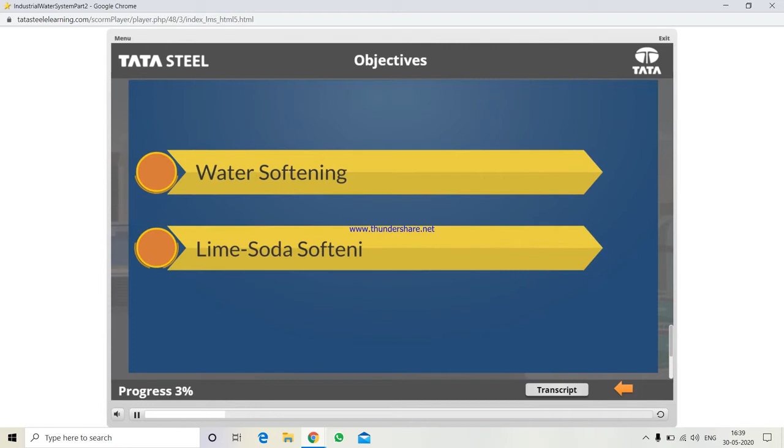This module will enable you to get an idea about water softening and lime soda softening. Explain about ion exchange, in which we will learn resin classification, cationic exchangers and anionic exchangers, ion exchange resin, regeneration,

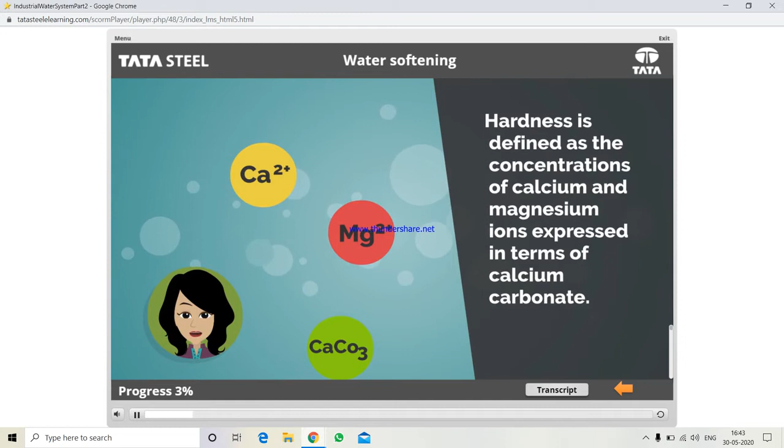They react with soap and produce a deposit called soap curd that remains on the skin and clothes, and because it is insoluble and sticky, it cannot be removed by rinsing. Thus, hard water is one that does not produce lather with soap.

Measurements of hardness are given in terms of the calcium carbonate equivalent. Water is considered to be hard if it has a hardness of 100 mg per liter or more as calcium carbonate.

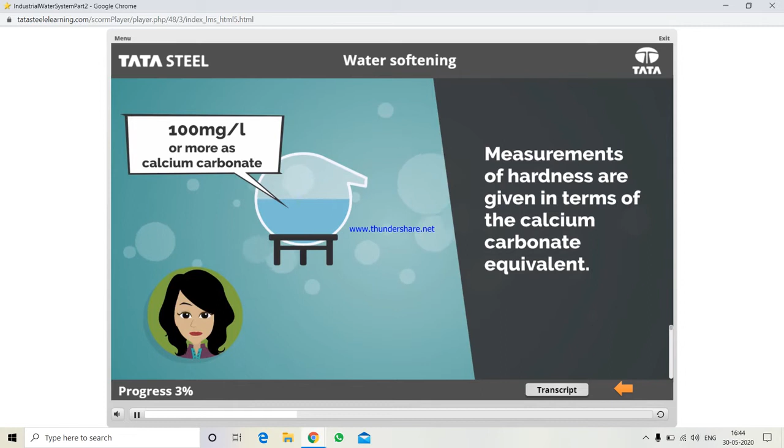There are two types of water hardness, temporary and permanent. Temporary hardness is due to the bicarbonate ion being present in the water. This type of hardness can be removed by boiling the water to expel the carbon dioxide.

Permanent hardness is due to calcium and magnesium nitrates, sulfates and chlorides. This type of hardness cannot be eliminated by boiling. Permanent hardness of water is removed by the ion exchange method in an ion exchanger.

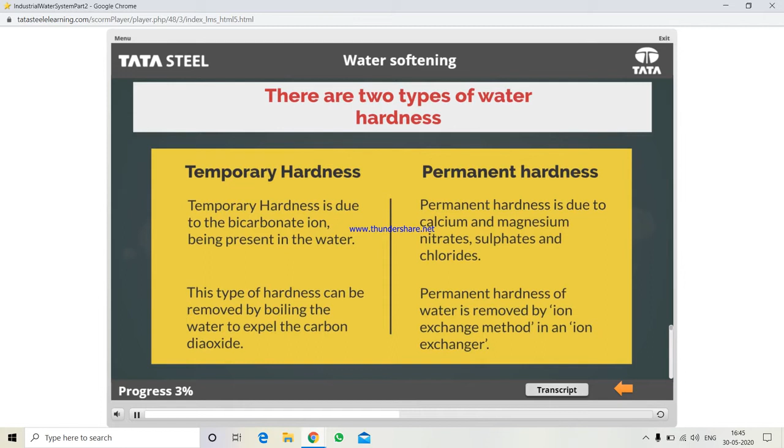Since it is important to remove hardness from water, we have opted for the water softening process. Softening is the removal of hardness from water. This is not a required part of the drinking water treatment process, since hard water does not have any health consequences. Rather, minerals are required for taste and health. In addition to being unsightly,

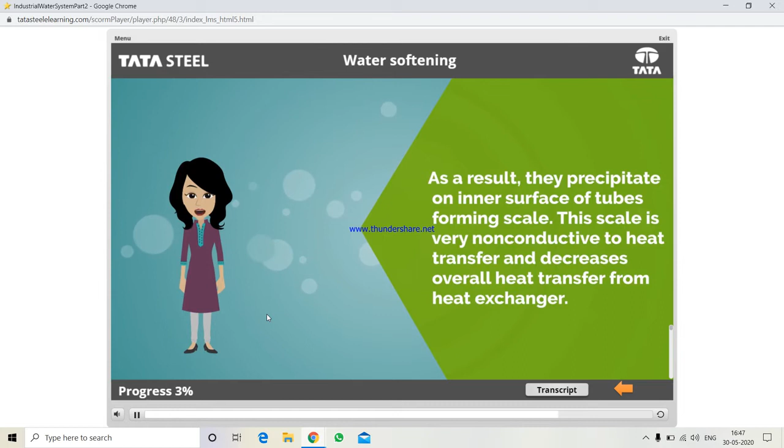the reaction of hard water with soap results in excessive use of soaps and detergents. Upon heating in a heat exchanger, unlike other solutes, solubility of soluble minerals decreases with rise in temperature. As a result, they precipitate on the inner surface of tubes, forming scale. This scale is very non-conductive to heat transfer and decreases overall heat transfer from the heat exchanger. This may result in overheating of tubes that can cause tube failure.

So, there are a few processes by which softening of water can be done. There are 3 types of softening treatment: chemical precipitation, lime soda softening, zeolite process, and reverse osmosis.

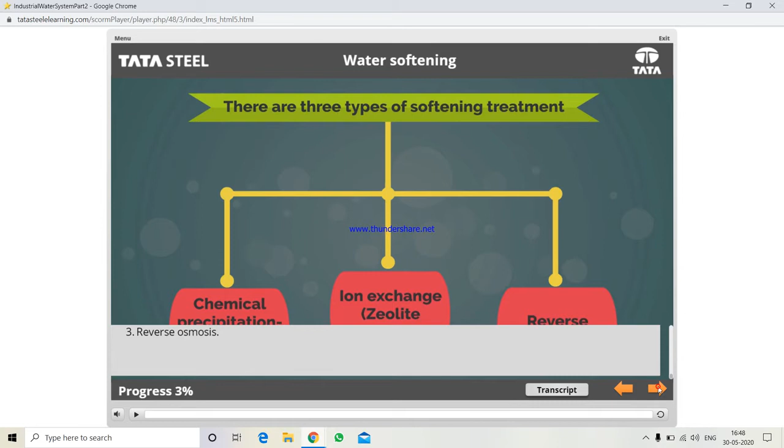The first process in water softening is lime soda softening. Have you ever learned about lime soda softening? If no, let's learn it now. In this process, calcium and magnesium ions are precipitated by the addition of lime and soda ash. Following are the reactions that take place in this process.

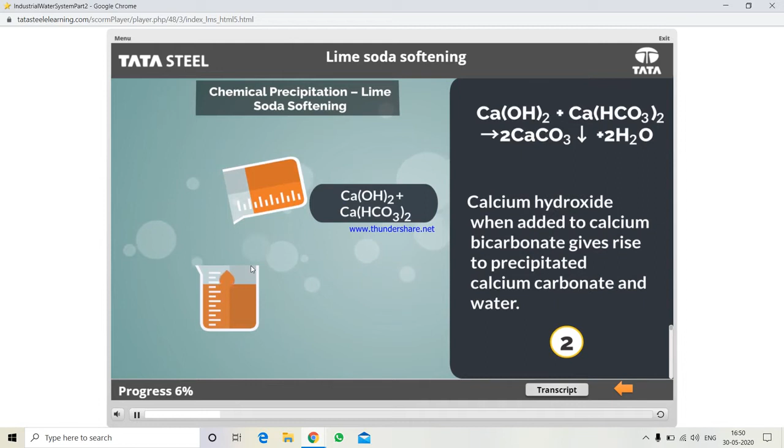Calcium hydroxide, when added to carbon dioxide, gives rise to precipitated calcium carbonate and water. Calcium hydroxide, when added to calcium bicarbonate, gives rise to precipitated calcium carbonate and water. Calcium hydroxide, when added to magnesium bicarbonate, gives rise to magnesium carbonate and precipitated calcium carbonate and water. Calcium hydroxide, when added to magnesium carbonate, gives rise to precipitated calcium carbonate and magnesium hydroxide.

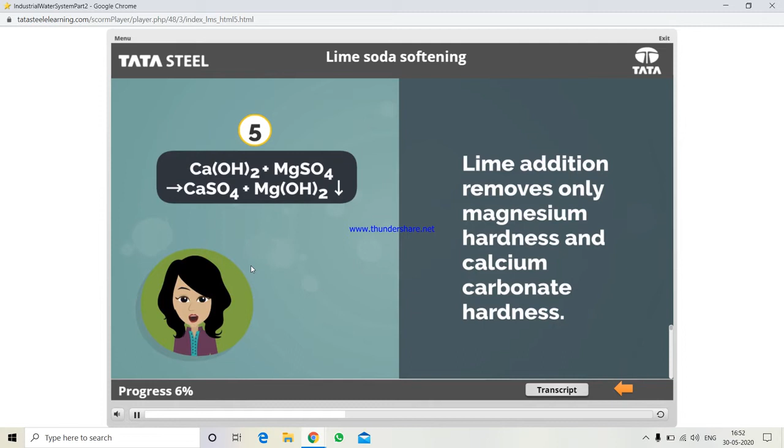Calcium hydroxide, when added to magnesium sulfate, gives rise to calcium sulfate and precipitated magnesium hydroxide. Let's go deeper into the process. Lime addition removes only magnesium hardness and calcium carbonate hardness. If you see in equation number 5, magnesium is precipitated. However, an equivalent amount of calcium is added. The water now contains the original calcium non-carbonate hardness and the calcium non-carbonate hardness produced in equation number 5.

Soda ash is added to remove calcium non-carbonate hardness. Sodium carbonate, when added to calcium sulfate, gives rise to sodium sulfate and precipitated calcium carbonate. Keeping the equations in mind, to precipitate calcium carbonate requires a pH of about 9.5 and to precipitate magnesium hydroxide requires a pH of about 10.8. Therefore, an excess lime of about 1.25 milliequivalents per liter is required to raise the pH.

The amount of lime required is equal to the amount of carbon dioxide in milliequivalents per liter plus carbonate hardness in milliequivalents per liter plus magnesium ion in milliequivalents per liter plus 1.25 milliequivalents per liter. The amount of soda ash required is equal to non-carbonate hardness in milliequivalents per liter.

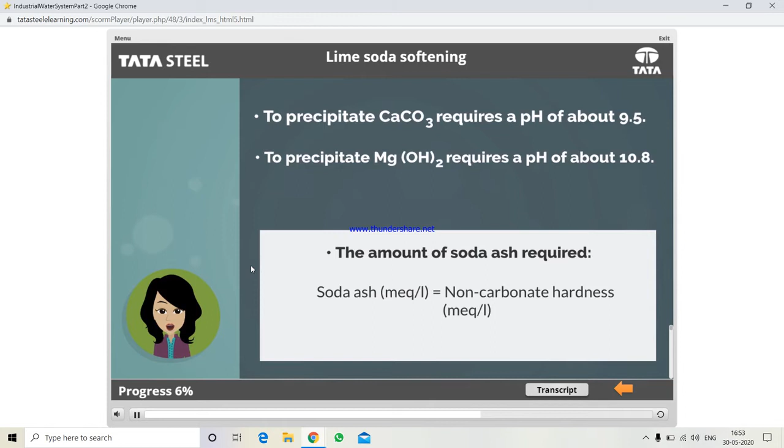After softening, the water will have high pH and contains excess lime and also magnesium hydroxide and calcium carbonate that did not precipitate. Recarbonation, that is addition of carbon dioxide, is done in order to stabilize the water. The excess lime and magnesium hydroxide are stabilized by adding carbon dioxide, which also reduces pH from 10.8 to 9.5.

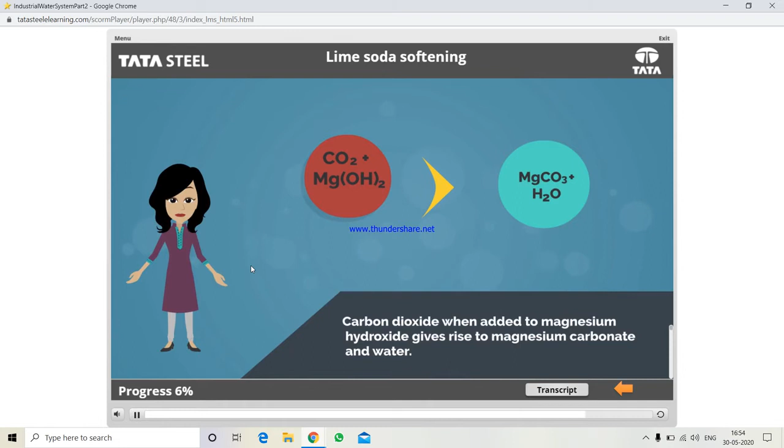Carbon dioxide, when added to calcium hydroxide, gives rise to precipitated calcium carbonate and water. Carbon dioxide, when added to magnesium hydroxide, gives rise to magnesium carbonate and water. Further recarbonation will bring the pH to about 8.5 and stabilize the calcium carbonate. Carbon dioxide, when added with calcium carbonate and water, gives rise to calcium hydrogen carbonate.

It is not possible to remove all of the hardness from water. In actual practice, about 50 to 80 mg per liter will remain as residual hardness.

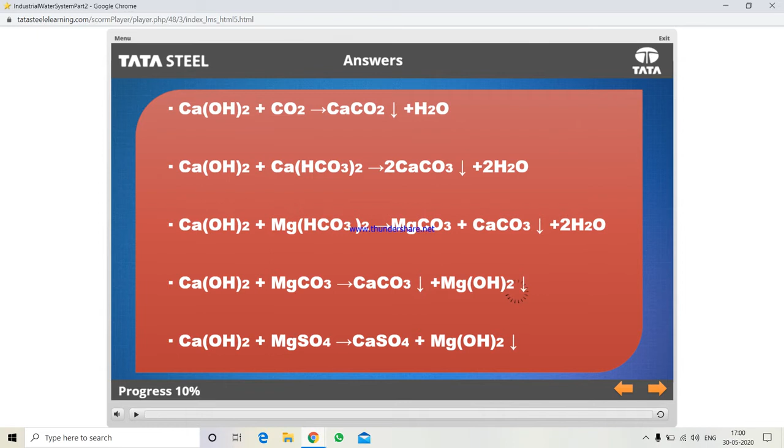Remember the previous session where we ended up with lime soda softening, which takes up a major role in removing the hardness from water. After the softening process, the water undergoes ion exchange, which is an adsorption phenomenon where the mechanism of adsorption is electrostatic. Electrostatic forces hold ions to charged functional groups on the surface of the ion exchange resin. The adsorbed ions replace ions that are on the resin surface on a 1:1 ratio charge basis.

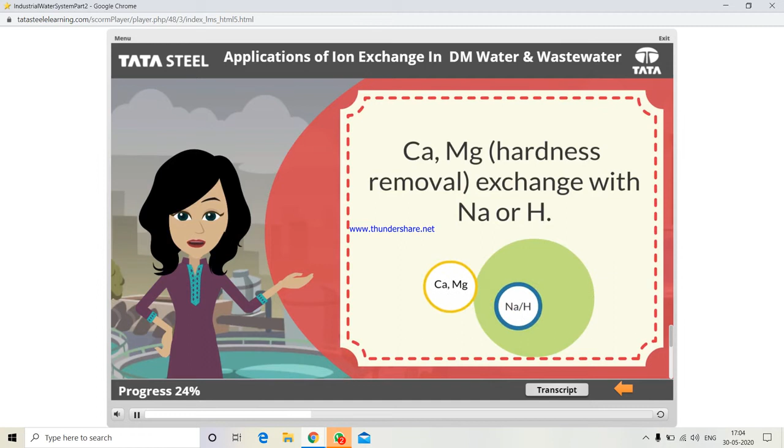As we have now understood the ion exchange phenomenon, let's note down the applications of ion exchange in treatment of DM water and wastewater. Calcium and magnesium, that is hardness removal, exchange with sodium or hydrogen. Iron and manganese removal from groundwater.

Recovery of valuable waste products: silver, gold, uranium. Demineralization, that is, exchange all cations for hydrogen ion and all anions for hydroxide ion. Removal of nitrate, ammonium, phosphate, that is nutrient removal.

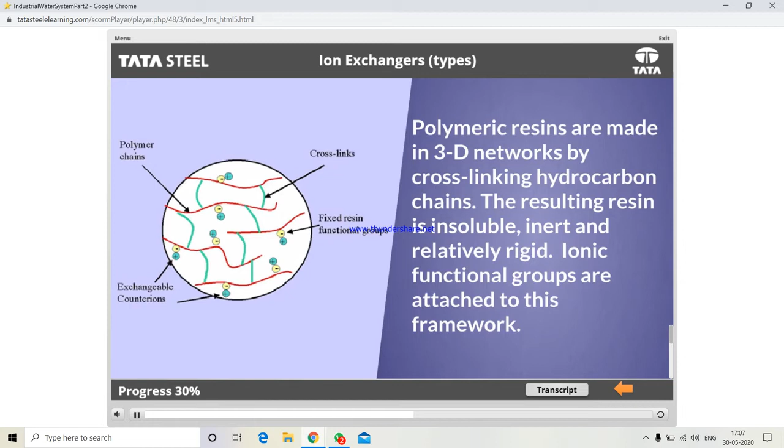These resins are generally manufactured by polymerizing neutral organic molecules, such as styrene, to form polystyrene, and then cross-linked with divinyl benzene, that is, DVB. Functional groups are then added according to the intended use. For example, the resin can be sulfonated by adding sulfuric acid to get the structure shown.

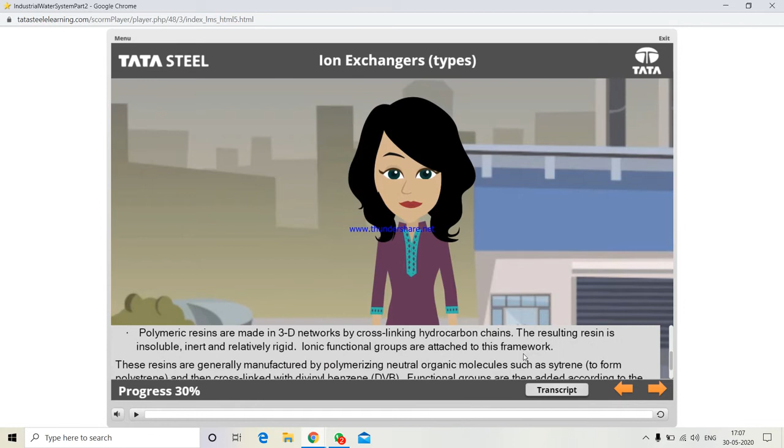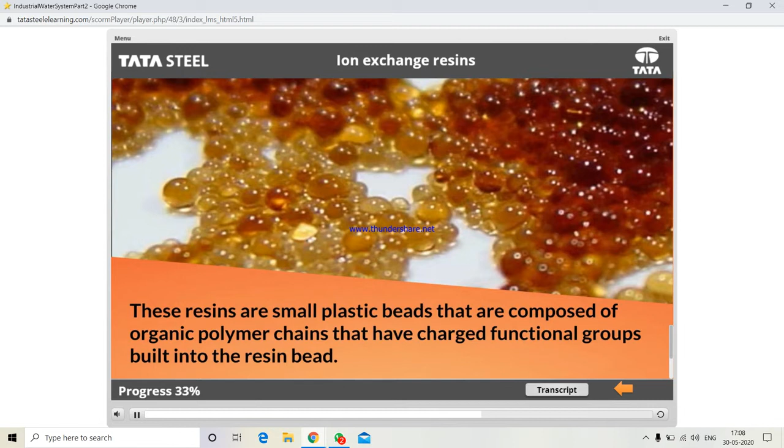Let us know more about the uses of ion exchange resins. The ion exchange resins are used to produce deionized, that is, demineralized water. These resins are small plastic beads that are composed of organic polymer chains that have charged functional groups built into the resin bead. You can clearly see the structure of an ion resin bead in this picture.

Resin classification. Resins are classified based on the type of functional group they contain and their percentage of cross-linkages. So they are basically of two types: cationic exchangers and anionic exchangers.

Cationic exchangers. Strongly acidic in cationic exchangers, which are functional groups derived from strong acids.

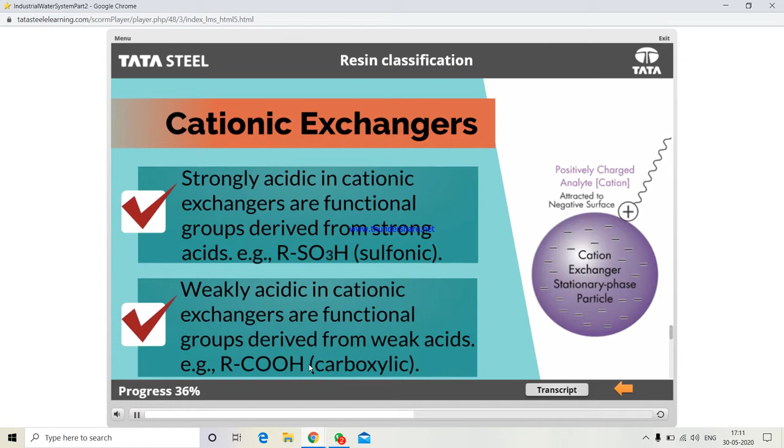Weakly acidic in cationic exchangers, which are functional groups derived from weak acids. Anionic exchangers. Strongly basic in anionic exchangers, which are functional groups derived from quaternary ammonium compounds. Weakly basic in anionic exchangers, which are functional groups derived from primary and secondary amines.

The regeneration of cation and anion exchange resins used in deionizers is a more complicated process than simple softening. Spent or exhausted columns must be regenerated because of the cost of the resin that would make one-time use prohibitive. Since ion exchange is a very reversible process, regeneration can be accomplished by manipulation of solution composition. Let us also see an example.

A spent column used to remove calcium cation is to be regenerated in a batch process to the sodium cation form. A strong brine, mostly sodium chloride, is contacted with the exhausted resin to replace calcium with sodium. The strong acid cation exchanger resin is regenerated with sulfuric or hydrochloric acid, which effectively strips off the calcium, magnesium and sodium from the resin, substituting hydrogen. Caustic soda or sodium hydroxide is used to regenerate the anion resin, exchanging the collected anions for the hydroxide ion in the caustic.

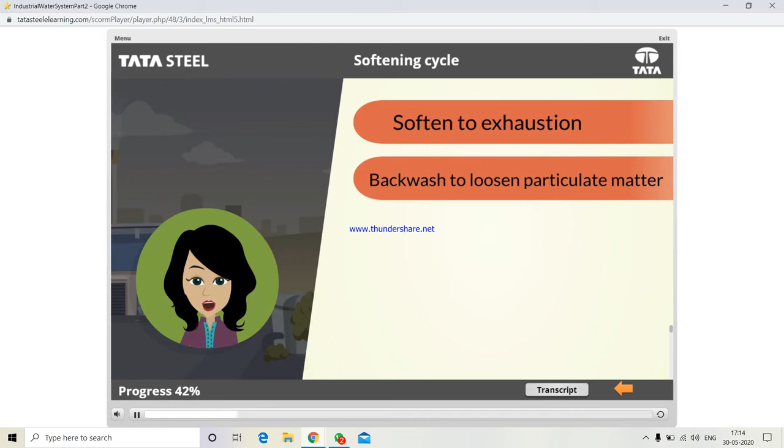The softener removes hardness from water by a process known as ion exchange, and the steps involved are: soften to exhaustion. In this process, the water will be softened. Backwash. In this process, the direction of flow is reversed and the silt, sediment, and iron particles are flushed from the resin. Regeneration. In this stage, the brine solution is slowly passed through the resin until the resin retains as much sodium as possible.

Rinse. Excess brine is rinsed from the resin. Return to forward flow. The resin bed is compacted for maximum operating efficiency. The water softener then returns to the service cycle. Let us now note down the operating parameters for the softening cycle.

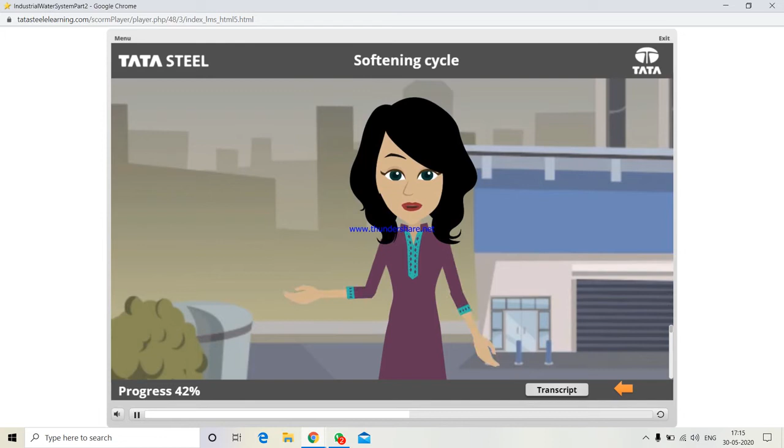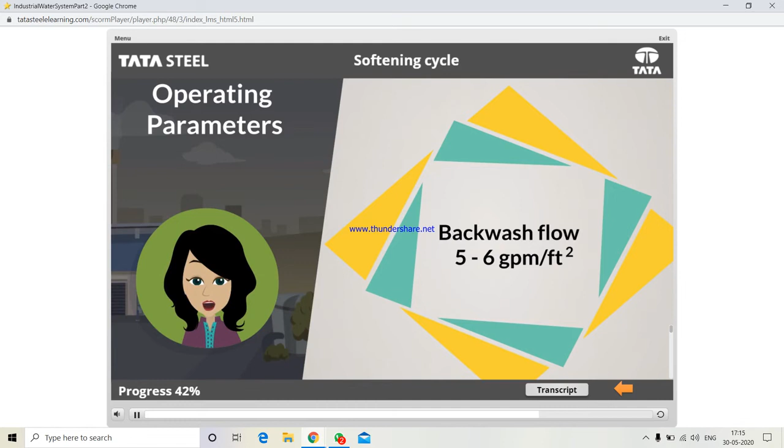Operating parameters. The operating exchange capacity is 0.6 to 1.2 equivalents per liter. Bed depth is 2 to 6 feet. Head loss is 1 to 2 feet. Softening flow is 5 to 10 gallons per minute per square foot. Backwash flow is 5 to 6 gallons per minute per square foot.

Salt dose is 3 to 10 pounds per cubic foot resin brine. Brine contact time 25 to 45 minutes. Rinse flow 1 to 5 gallons per minute per square foot. Rinse volume 20 to 40 gallons per cubic foot resin.

Remember, previously we discussed a process called sedimentation, which was explained by Mr. Ashok. Today, he will be telling us about RO. Thank you, Shreya. Hello everybody. I know that many of you are aware about RO, but it is a little different from what you know.

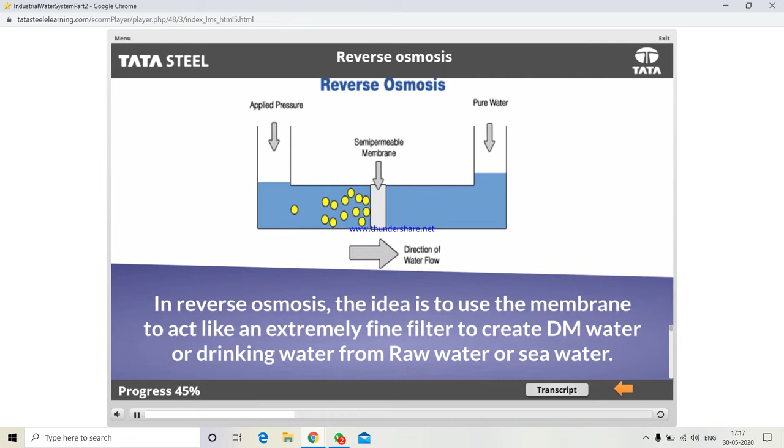So reverse osmosis is a separation process that uses pressure to force a solvent through a membrane that retains the solute on one side and allows the pure solvent to pass to the other side, meaning it allows the passage of solvent but not of solute. In reverse osmosis, the idea is to use the membrane to act like an extremely fine filter to create DM water or drinking water from raw water or sea water.

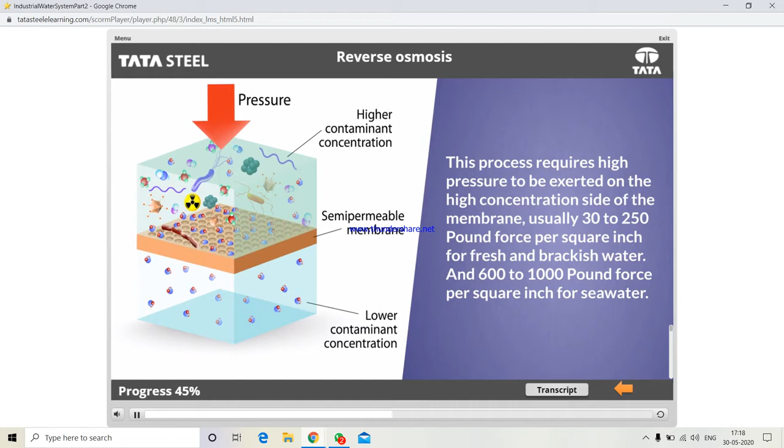The membranes used for reverse osmosis have a dense barrier layer in the polymer matrix where most separation occurs. In most cases, the membrane is designed to allow only water to pass through this dense layer while preventing the passage of solutes. This process requires high pressure to be exerted on the high concentration side of the membrane, usually 30 to 250 psi for fresh water and brackish water, and 600 to 1000 psi for seawater. Reverse osmosis is used to reduce dissolved solids from feed waters.

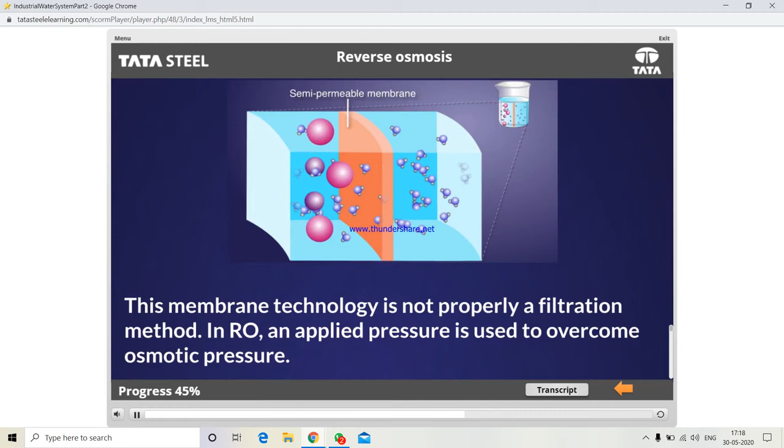Let us see the actual working involved in this process. Reverse osmosis is a water purification technology that uses a semi-permeable membrane. This membrane technology is not properly a filtration method. In RO, an applied pressure is used to overcome osmotic pressure.

RO can remove many types of molecules and ions from solutions and is used in both industrial processes and in producing potable water. Reverse osmosis works by using a high pressure pump to increase the pressure on the salt side of the RO and force the water across the semi-permeable RO membrane, leaving almost all, around 95% to 99%, of dissolved salts behind in the reject stream.

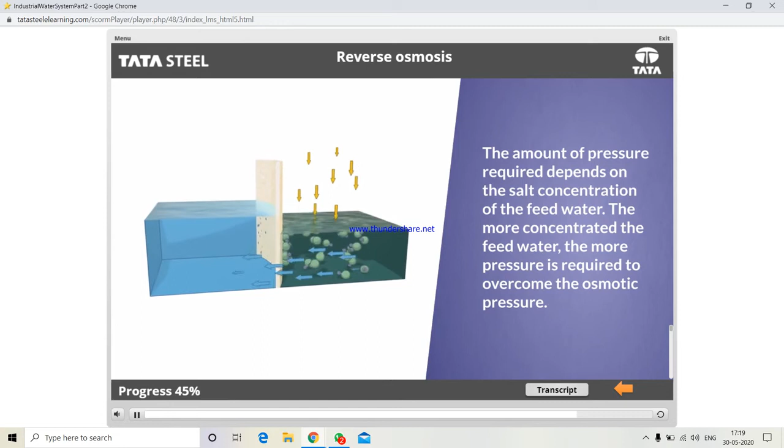The amount of pressure required depends on the salt concentration of the feed water. The more concentrated the feed water, the more pressure is required to overcome the osmotic pressure. The desalinated water that is demineralized or deionized is called permeate water. The water stream that carries the concentrated contaminants that did not pass through the RO membrane is called concentrate stream.

Thank you, sir, for the explanation.

In our houses and industries, we do have an RO water filter that purifies water. Have you ever thought, how does it work? RO systems commonly come in either single pass or double pass configurations. The feed water enters the RO membrane under pressure that is enough to overcome osmotic pressure.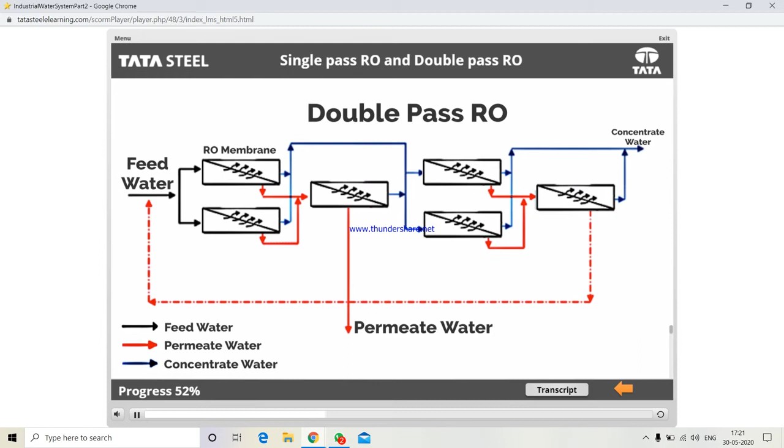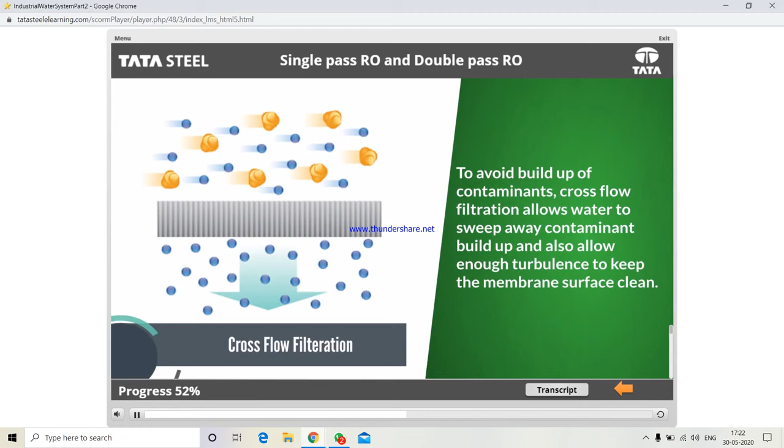An RO system employs cross-filtration rather than standard filtration, where the contaminants are collected within the filter media. With cross-filtration, the solution passes through the filter with two outlets. The filtered water goes one way and the contaminated water goes another way. To avoid buildup of contaminants, cross-flow filtration allows water to sweep away contaminant buildup and also allows enough turbulence to keep the membrane surface clean.

Learning more about the RO process, let us see what else can be done in the process. Reverse osmosis is capable of removing up to 99% of the dissolved salts, particles, colloids, organics, bacteria, and pyrogens from the feed water. An RO membrane rejects contaminants based on their size and charge. Any contaminant that has a molecular weight greater than 200 is rejected by an RO system. The greater the ionic charge of the contaminant, the more likely it will be unable to pass through the RO membrane.

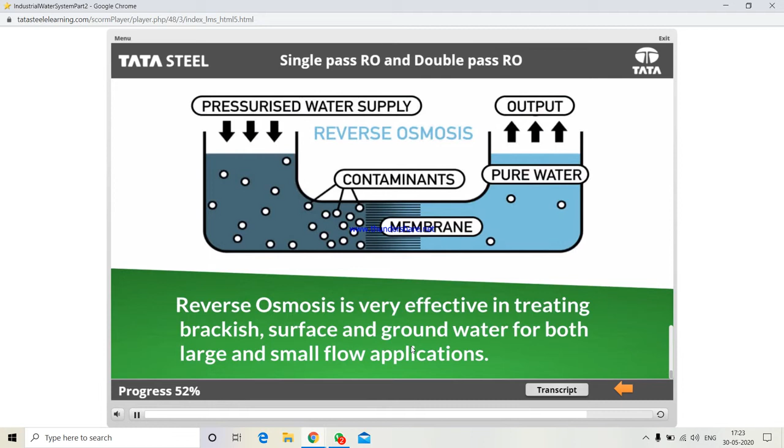Reverse osmosis is very effective in treating brackish, surface and groundwater for both large and small applications. Some examples of industries that use RO water include pharmaceutical, boiler feed water, food and beverage, metal finishing, and semiconductor manufacturing.

Did you know 300 tons of water is required to manufacture 1 ton of steel?

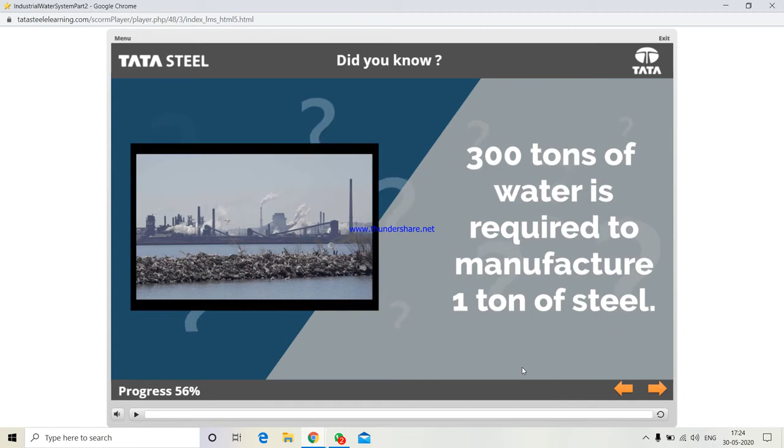Do you know any device that removes oxygen? Yes, you are right. We will be discussing the deaerator. A deaerator is a device that is widely used for the removal of oxygen and other dissolved gases from the feed water to steam generating boilers.

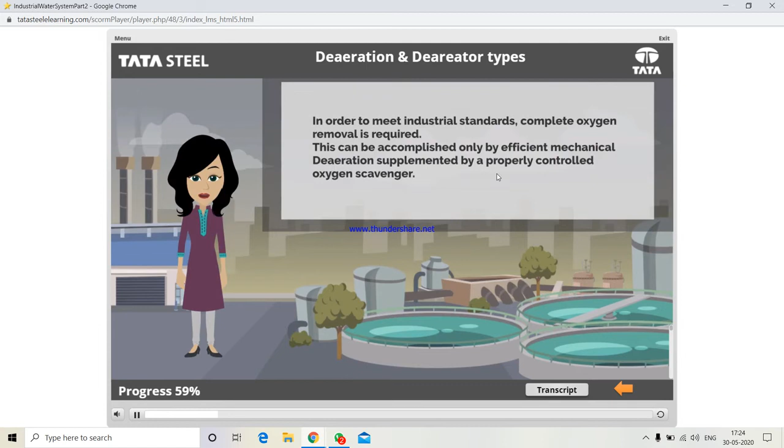In order to meet industrial standards for both oxygen content and the allowable metal oxide levels in feed water, nearly complete oxygen removal is required. This can be accomplished only by efficient mechanical deaeration supplemented by a properly controlled oxygen scavenger. Solubility of any gas in a liquid is directly proportional to the partial pressure of the gas at the liquid surface. It decreases with increasing liquid temperature. Efficiency of removal is increased when the liquid and gas are thoroughly mixed.

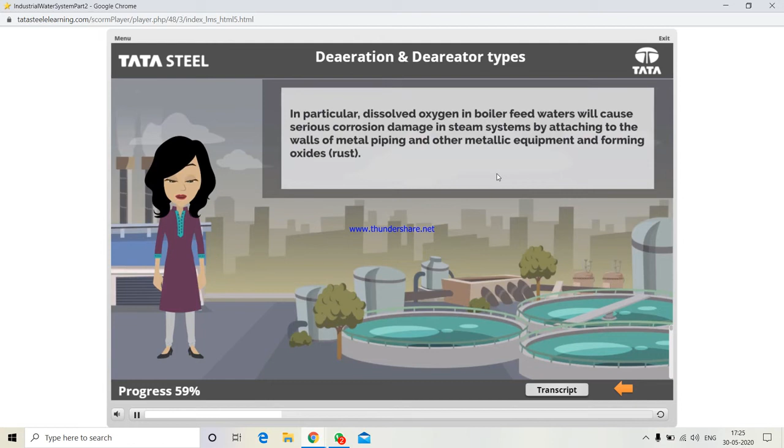In particular, dissolved oxygen in boiler feed waters will cause serious corrosion damage in steam systems by attaching to the walls of metal piping and other metallic equipment and forming oxides, that is, rust. Dissolved carbon dioxide combines with water to form carbonic acid that causes further corrosion.

Most deaerators are designed to remove oxygen down to levels of 7 parts per billion by weight, 0.005 cubic centimeters per liter or less, as well as essentially eliminating carbon dioxide. You can see in the diagram how deaeration takes place.

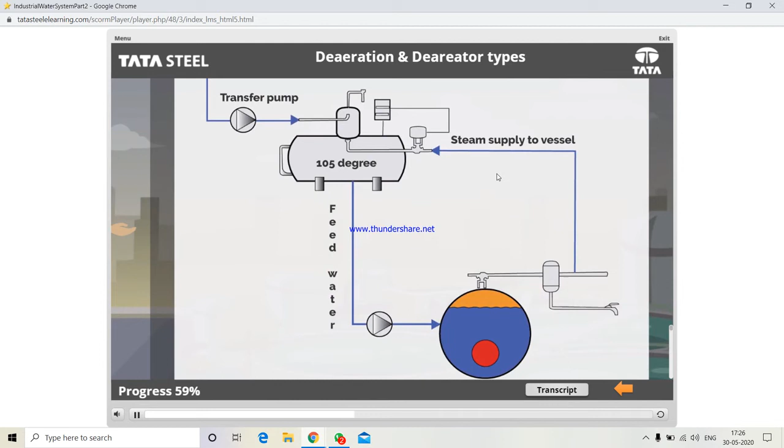Talking about the deaerators, there are two basic types of deaerators: the tray type and the spray type.

Tray type deaerator: the typical horizontal tray type deaerator has a vertical domed deaeration section mounted above a horizontal boiler feed water storage vessel. Boiler feed water enters the vertical deaeration section above the perforated trays and flows downward through the perforations. Low pressure deaeration steam enters below the perforated trays and flows upward through the perforations.

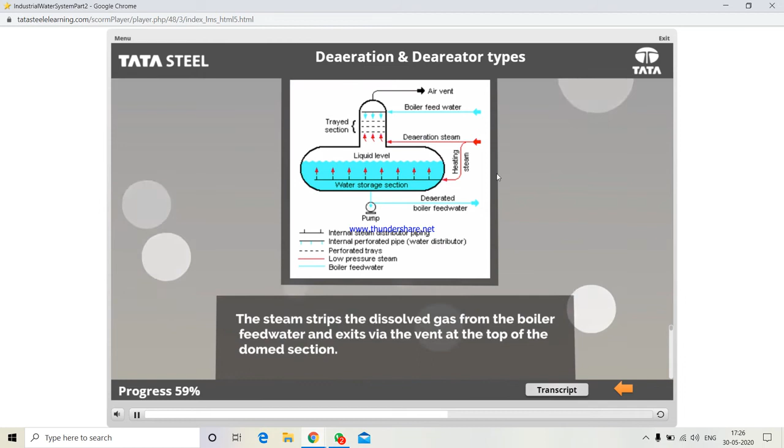The steam strips the dissolved gas from the boiler feed water and exits via the vent at the top of the domed section. The deaerated water flows down into the horizontal storage vessel from where it is pumped to the steam generating boiler system. Low pressure heating steam, which enters the horizontal vessel through a sparger pipe in the bottom of the vessel, is provided to keep the stored boiler feed water warm. External insulation of the vessel is typically provided to minimize heat loss.

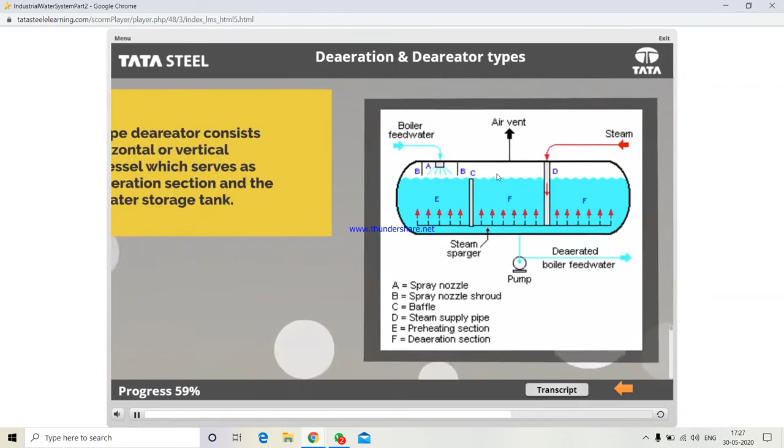The spray type deaerator consists only of a horizontal or vertical cylindrical vessel which serves as both the deaeration section and the boiler feed water storage tank. The typical spray type deaerator is a horizontal vessel which has a preheating section and a deaeration section. The two sections are separated by a baffle.

Low pressure steam enters the vessel through a sparger in the bottom of the vessel. The boiler feed water is sprayed into the section where it is preheated by the rising steam from the sparger. The purpose of the feed water spray nozzle and the preheat section is to heat the boiler feed water to its saturation temperature to facilitate stripping out the dissolved gases in the following deaeration section.

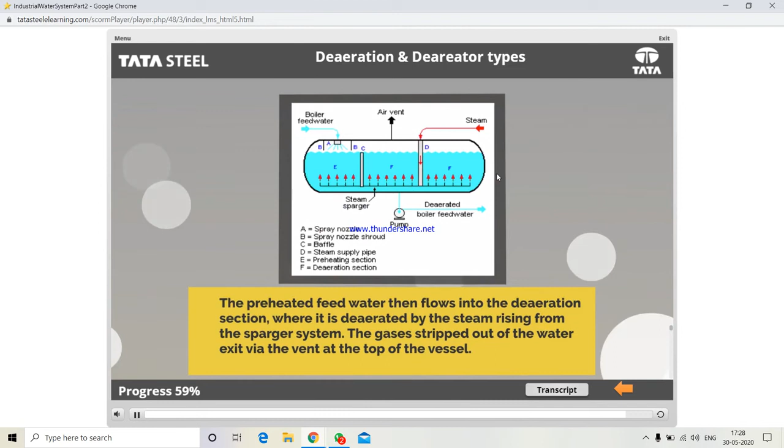The preheated feed water then flows into the deaeration section where it is deaerated by the steam rising from the sparger system. The gas is stripped out of the water and exits via the vent at the top of the vessel.

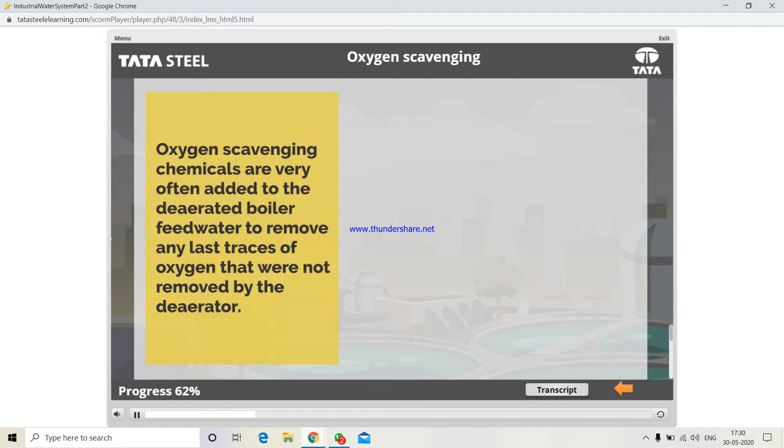The type of chemical added depends on whether the location uses a volatile or non-volatile water treatment program. Lower pressure systems, that is less than 650 psi, use a non-volatile program. Higher pressure systems, that is greater than 650 psi, and all other systems where certain highly alloyed materials are present are now using volatile programs as the old phosphate-based programs go away.

The most commonly used oxygen scavenger for lower pressure systems is sodium sulfite. It is very effective and rapidly reacts with traces of oxygen to form sodium sulfate, which is non-scaling.

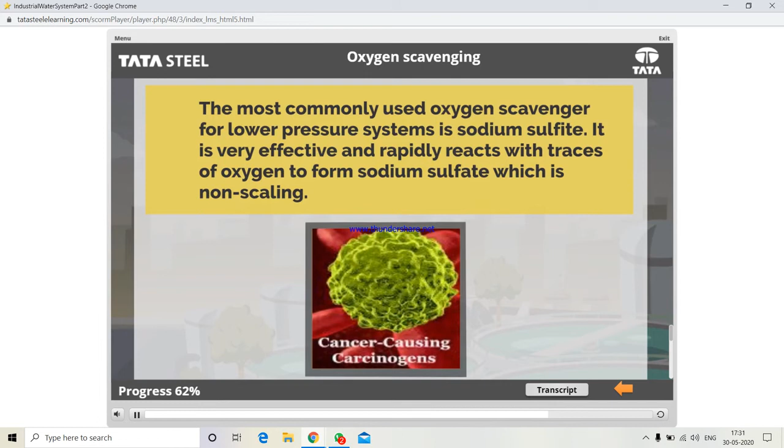Another widely used oxygen scavenger, properly diluted and for locations using volatile programs, is hydrazine. However, hydrazine is a carcinogen. Other scavengers include carbohydrazide, diethyl hydroxylamine, nitrilotriacetic acid, ethylene diamine tetraacetic acid, and hydroquinone.

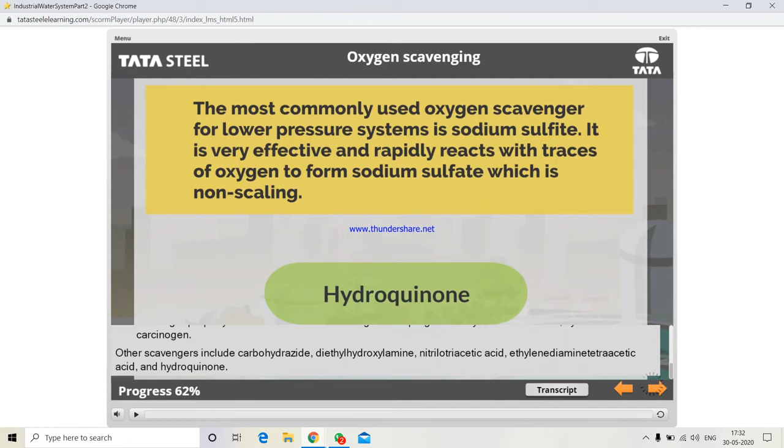Since we have an idea of what is happening exactly in the water treatment till now, let us check out the overview of the DM plant. In industrial water treatment, demineralization refers to the removal of dissolved solids from the feed water and process streams.

What is water demineralization? Demineralization is a type of water purification, while it can refer to any treatment process that removes minerals from water. The term demineralization is typically reserved specifically for ion exchange processes used for near total removal of ionic mineral contaminants.

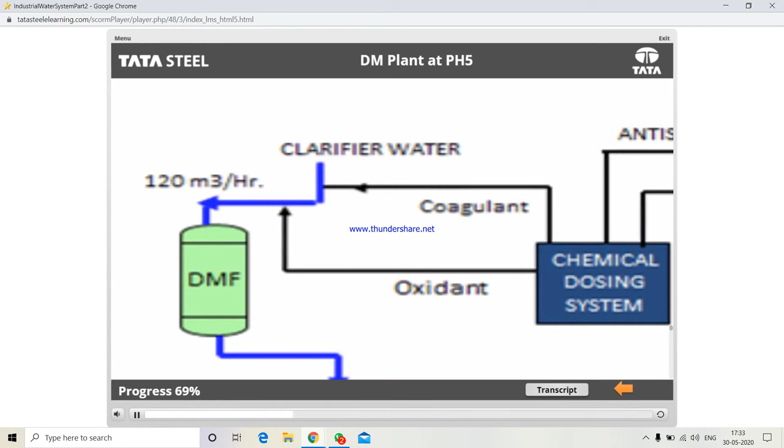Let us get deeper into the topic by knowing about the procedure involved at Powerhouse 5 of Tata Steel as a case study. At DM water plant at PH5, clarified water from the river pump house enters into the dual media filter for primary filtration of suspended solids in water.

Anthracite and sand are the filtering medium in the dual media filter. Before receiving it at dual media filter, also called DMF, coagulant, that is ferric chloride FeCl3, and oxidant, that is sodium hypochlorite NaOCl, are added for coagulation and disinfection.

Then water from DMF enters into a contact tank of 100 cubic meter volume. Here, retention time is allowed for the reaction to complete with coagulant and disinfectant.

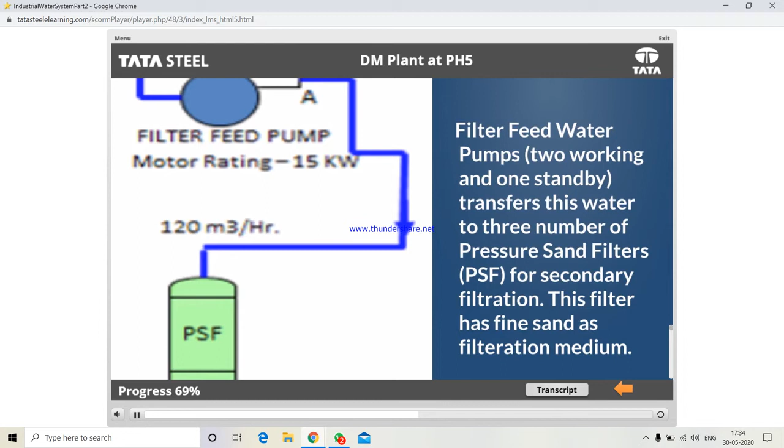Filter feed water pumps, that is 2 working and 1 standby, transfer this water to 3 pressure sand filters, that is PSF, for secondary filtration. This filter has fine sand as filtration medium. DMF and pressure sand filter, also called PSF, together remove most of the suspended solids from water.

Water from the secondary filtration units, that is PSF, passes through 5 micron cartridge filters. Total suspended solids, which is called TSS, are completely removed here.

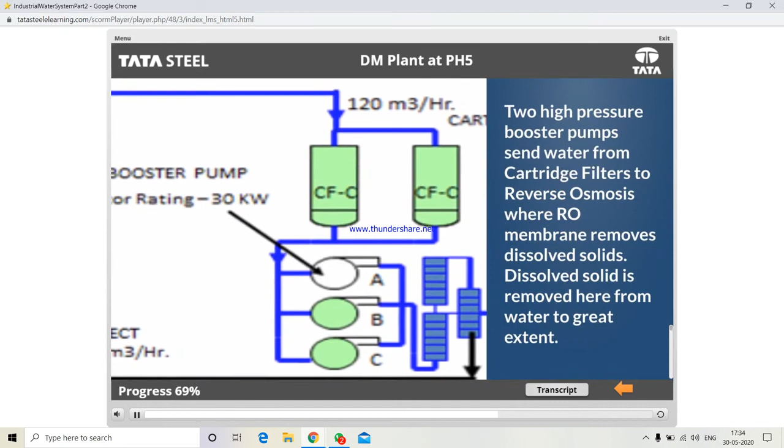Two high pressure booster pumps send water from cartridge filters to reverse osmosis, where the RO membrane removes dissolved solids to a great extent. Water from RO then goes to the degasser water tower to remove dissolved carbon dioxide, and the degassed water is stored in the degasser water storage tank.

Water is pumped from the degasser water storage tank to a mixed bed filled with two types of resins. Here, ion exchange takes place and total dissolved solids are completely removed. The water achieved is demineralized water, which is stored in the DM water storage tank.

From the DM water storage tank, water is sent to the boiler as per need. RO reject water and backwash water from primary and secondary filters is collected in a neutralization pit, where it is neutralized using hydrochloric acid or sulfuric acid and caustic soda as per norms. This water is finally discharged to the upper cooling pond.

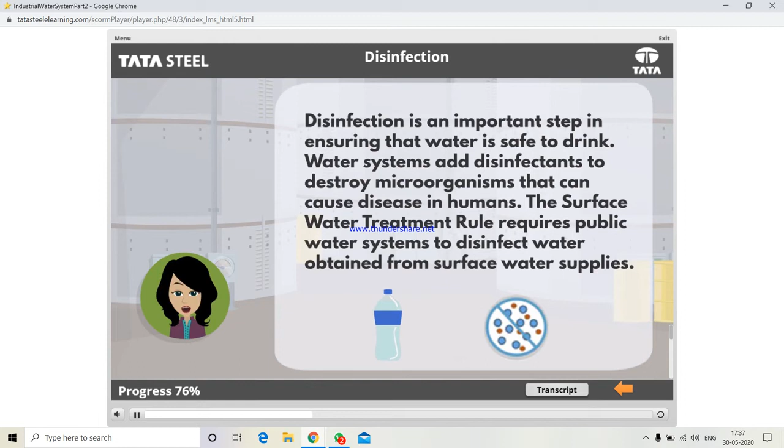Primary methods of disinfection are chlorination, chloramines, ozone, and ultraviolet light. Other disinfection methods include chlorine dioxide, potassium permanganate, and nanofiltration.

Since certain forms of chlorine react with organic material naturally present in many water sources to form harmful chemical byproducts that are carcinogens, maximum levels for those contaminants should be kept low in water.

There are two kinds of disinfection. Primary disinfection achieves the desired level of microorganism kill or inactivation, while secondary disinfection maintains a disinfectant residual in the finished water that prevents the regrowth of microorganisms.

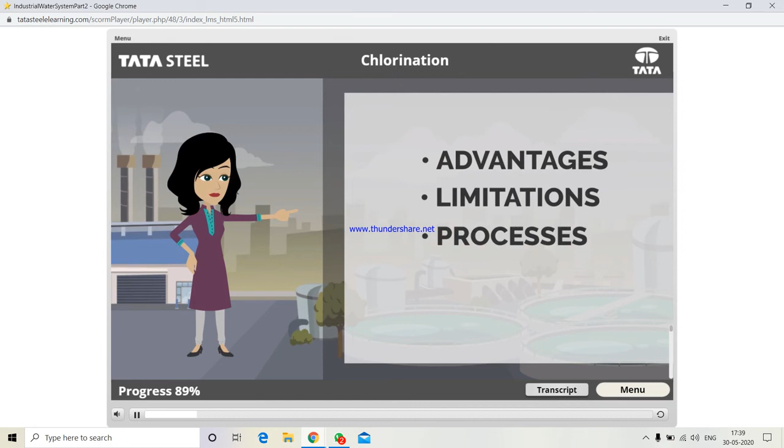There are many processes involved in removing pathogens and microorganisms from water. Let's learn about it one by one by discussing its advantages, limitations, process, equipment, and chemicals involved.

The first process is chlorination. Chlorination gas: at normal pressures, elemental chlorine is a toxic yellow-green gas, and is liquid at high pressures.

Advantages: chlorine is very effective for removing almost all microbial pathogens. Limitations: chlorine is a dangerous gas that is lethal at concentrations as low as 0.1% air by volume.

Process: chlorine gas is released from a liquid chlorine cylinder by a pressure reducing and flow control valve operating at a pressure less than atmospheric. The gas is led to an injector in the water supply pipe where highly pressurized water is passed through a venturi orifice, creating a vacuum that draws the chlorine into the water stream.

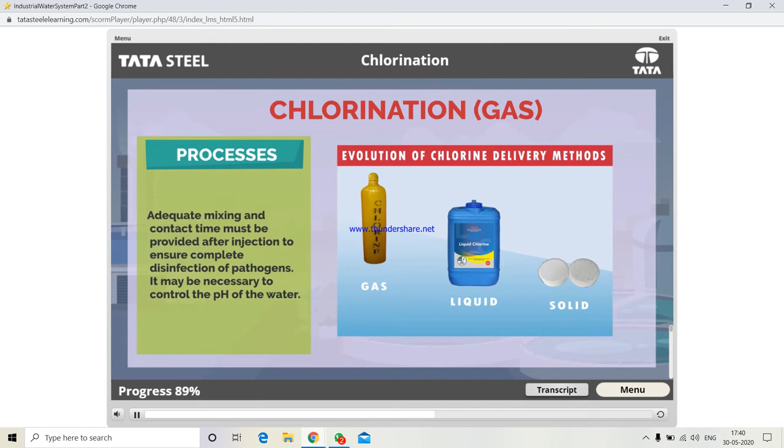Adequate mixing and contact time must be provided after injection to ensure complete disinfection of pathogens. It may be necessary to control the pH of the water.

Equipment: a basic system consists of a chlorine cylinder, a cylinder-mounted chlorine gas vacuum regulator, a chlorine gas injector, and a contact tank or pipe.

Provincial or state regulations would require that a second cylinder and gas regulator be provided with a changeover valve to ensure continuity of disinfection. Additional safety and control features may be required.

A gas chlorinator should be installed in a room or chamber with direct emergency access to outside air and fitted with an exhaust fan ventilation system. Statutory safety regulations must be observed.

If not on-site, self-contained breathing apparatus and a chlorine cylinder repair kit should be available within a reasonable time frame or distance. Chemicals: chlorine gas is supplied as liquid in high pressure cylinders.

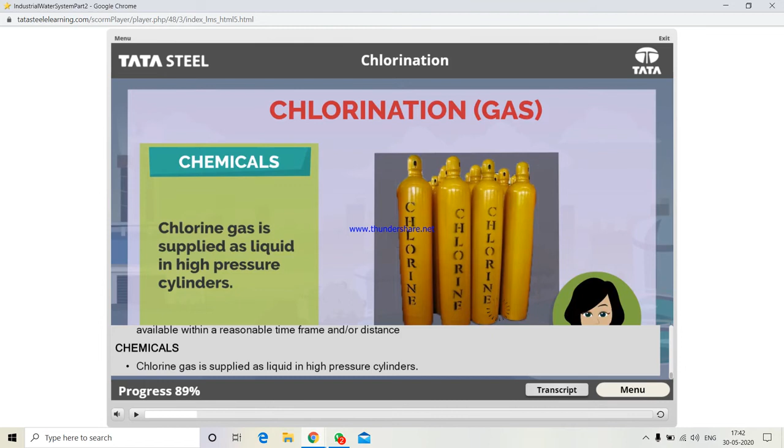The second process of chlorination is based on using sodium hypochlorite solution. It is available as a solution in concentrations of 5 to 15% chlorine.

Advantages: it is easier to handle than gaseous chlorine. Limitations: sodium hypochlorite is very...

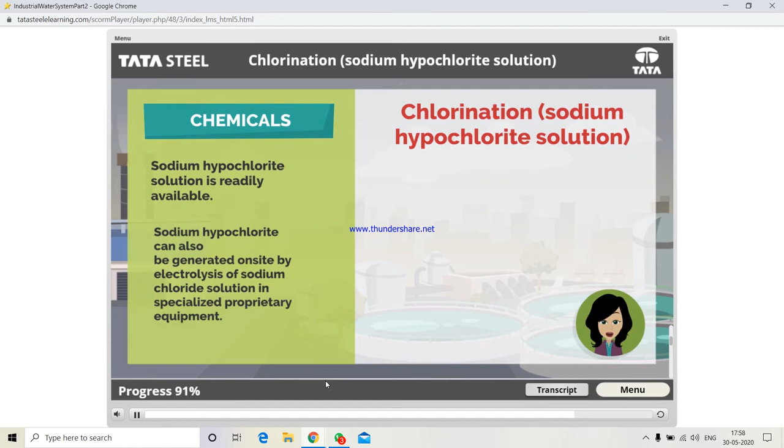Chemicals: sodium hypochlorite solution is readily available. Sodium hypochlorite can also be generated on-site by electrolysis of sodium chloride solution in specialized proprietary equipment. The only supplies required are common salt and electricity. Hydrogen is given off as a byproduct and must be safely dispersed.

Click on the different tabs to know more. The third process of chlorination is based on using solid calcium hypochlorite. Calcium hypochlorite is a white solid that contains 65% available chlorine and dissolves easily in water.

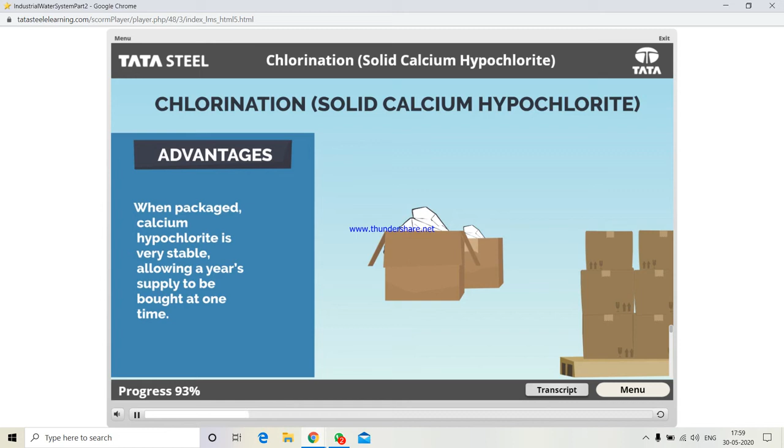Advantages. When packaged, calcium hypochlorite is very stable, allowing a year's supply to be bought at one time. Limitations. Calcium hypochlorite is a corrosive material with a strong odor that requires proper handling. It must be kept away from organic materials such as wood, cloth, and petroleum products. Reactions between calcium hypochlorite and organic material can generate enough heat to cause a fire or explosion.

Calcium hypochlorite readily absorbs moisture, forming chlorine gas. Therefore, shipping containers must be emptied completely or carefully resealed. Process. Calcium hypochlorite must be dissolved in a mixing or holding tank and injected in the same manner as sodium hypochlorite. Alternatively, where the pressure can be lowered to atmospheric, such as at a storage tank, tablets of hypochlorite can be directly dissolved in the free-flowing water by a proprietary device that provides flow proportional chlorination with gravity feed of the tablets.

Equipment. The equipment used to mix the solution and inject it into the water is the same as that for sodium hypochlorite. Solutions of 1 or 2% available chlorine can be delivered by a diaphragm type chemical feed or metering pump or by tablet chlorinator. Chemicals. Calcium hypochlorite can be purchased in granular, powdered or tablet form.

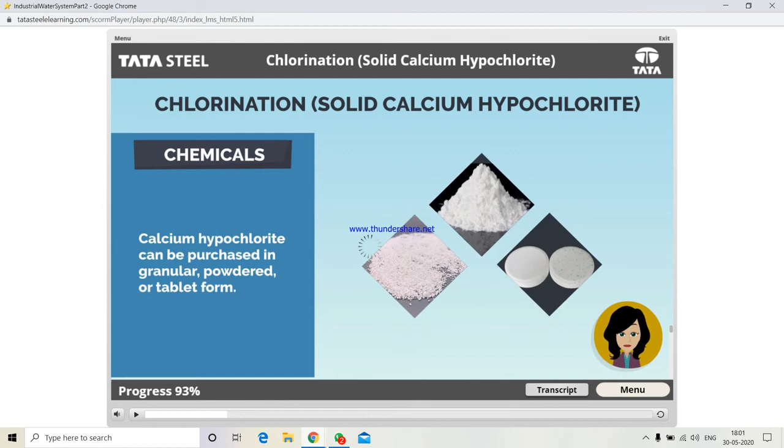Click on the different tabs to know more. The next process of disinfection is based on using chloramine. Chloramines are formed when water containing ammonia is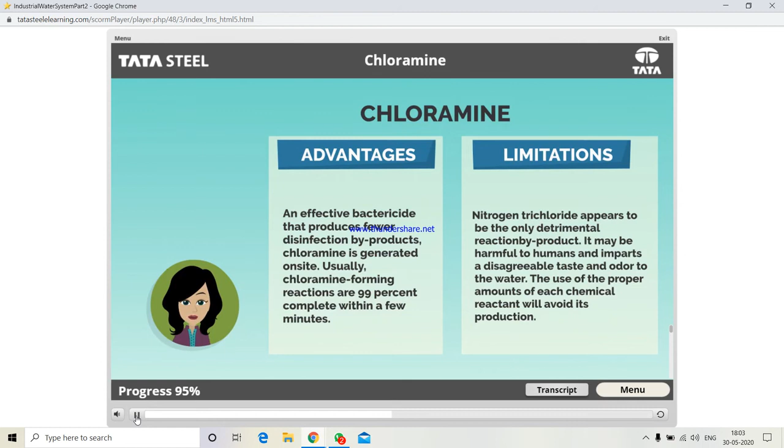Process. Chlorine is injected into the supply main followed immediately by injection of ammonia. As before, adequate mixing and contact time must be provided. The mix of products produced when water, chlorine and ammonia are combined depends on the ratio of chlorine to ammonia and the pH of the water. Chlorine to ammonia ratios of 5:1 should not be exceeded. If the pH drops below 5, some nitrogen trichloride may be formed.

Equipment. The generation of chloramines requires the same equipment as chlorination plus equipment for adding ammonia. Chemicals. Chemicals used to generate chloramine from ammonia and chlorine gas depend on the ammonia-based chemical used. Anhydrous ammonia is the least expensive, while ammonium sulfate is the most expensive.

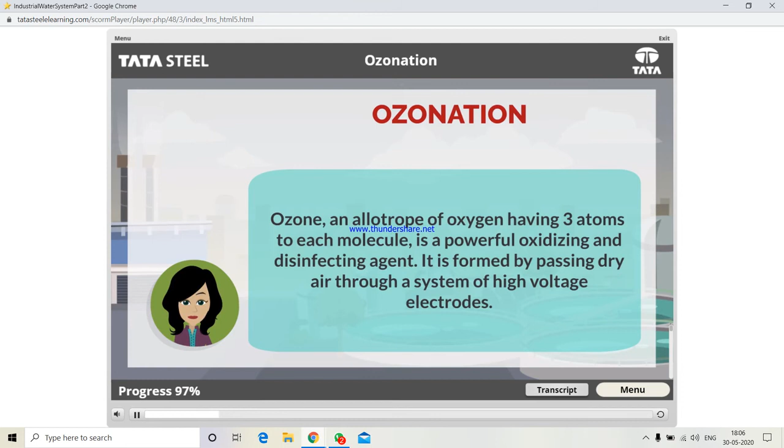Advantages: requiring shorter contact time and dosage than chlorine. Ozone is widely used as a primary disinfectant in many parts of the world. Ozone does not directly produce halogenated organic materials unless a bromide ion is present. Limitations: ozone gas is unstable and must be generated on-site. A secondary disinfectant, usually chlorine, is required because ozone does not maintain an adequate residual in water.

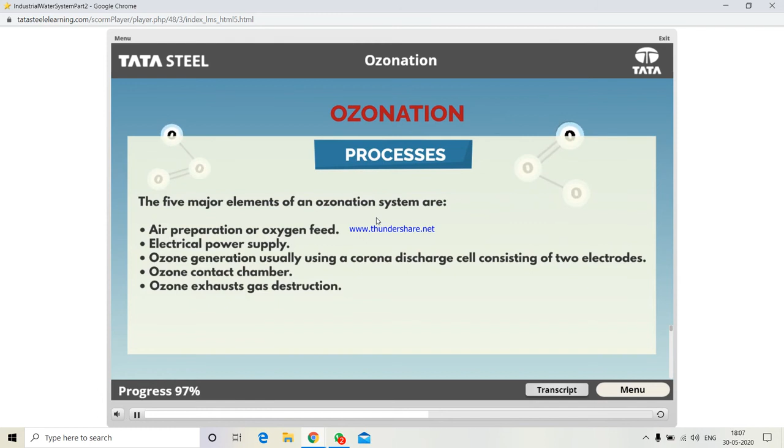Process: the 5 major elements of an ozonation system are air preparation or oxygen feed, electrical power supply, ozone generation, usually using a corona discharge cell consisting of 2 electrodes, ozone contact chamber, and ozone exhaust gas destruction. Ozonation equipment includes air preparation equipment, an ozone generator, contactor, destruction unit, and instrumentation and controls. The capital costs of ozonation systems are relatively high.

Operation and maintenance are relatively complex. Electricity represents 26 to 43% of total operating and maintenance costs for small systems. Chemicals: for many applications, pure oxygen is a more attractive ozone feed gas than air because it has a higher production density.

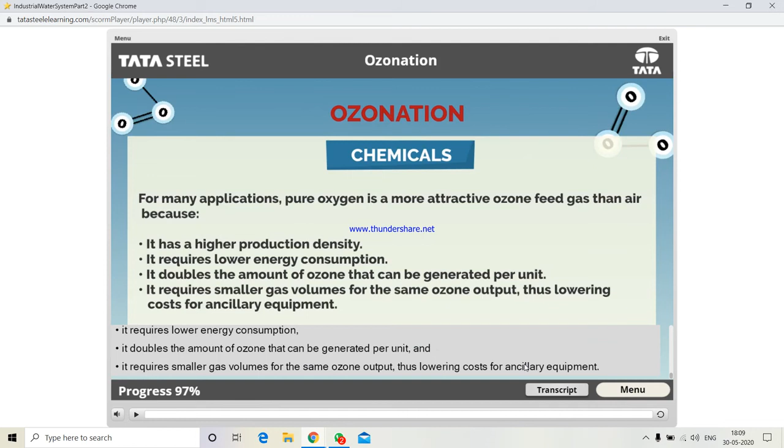Click on the different tabs to know more. The process of disinfection is based on using ultraviolet light, that is UV. Ultraviolet UV radiation is generated by a special lamp. When it penetrates the cell wall of an organism, the cell's genetic material is disrupted and the cell is unable to reproduce.

Advantages: UV radiation effectively destroys bacteria and viruses. As with ozone, a secondary disinfectant must be used to prevent regrowth of microorganisms. UV radiation can be attractive as a primary disinfectant for small systems because it is readily available. It produces no known toxic residuals. It requires short contact times and the equipment is easy to operate and maintain.

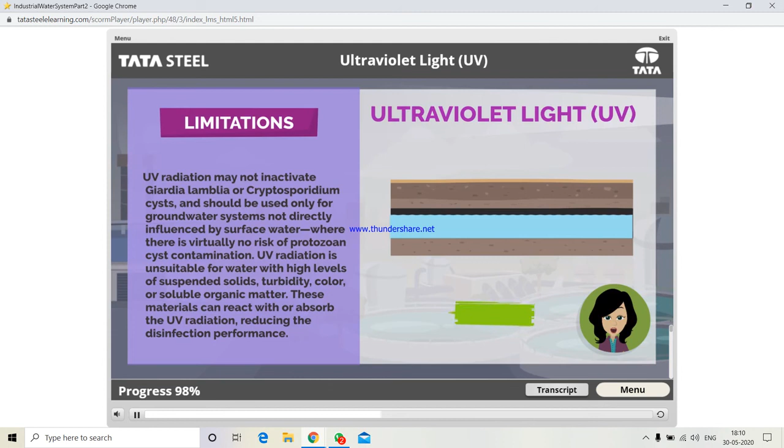Limitations: UV radiation may not inactivate Giardia lamblia or Cryptosporidium cysts and should be used only for groundwater systems not directly influenced by surface water, where there is virtually no risk of cyst contamination. UV radiation is unsuitable for water with high levels of suspended solids, turbidity, color, or soluble organic matter. These materials can react with or absorb the UV radiation, reducing the disinfection performance.

Process: the effectiveness of UV radiation disinfection depends on the energy dose absorbed by the organism, measured as the product of the lamp's intensity, that is, the rate at which photons are delivered to the target, and the time of exposure. If the energy dosage is not high enough, the organism's genetic material might only be damaged instead of destroyed. To provide a safety factor, the dosage should be higher than needed to meet disinfection requirements.

Equipment: UV lamps and a reactor. Chemicals: no chemical oxidant required. Therefore, microorganisms can be killed without generating byproducts of chemical oxidation or halogenation.

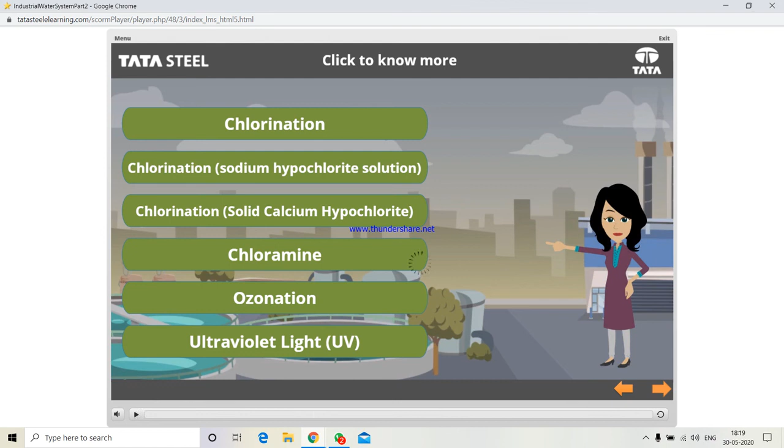Click on the different tabs to know more. As we have come to the end of the module, I believe that there are so many things to remember. Can we brush up once what we have learned till now? Definitely. Let's note down the important points.

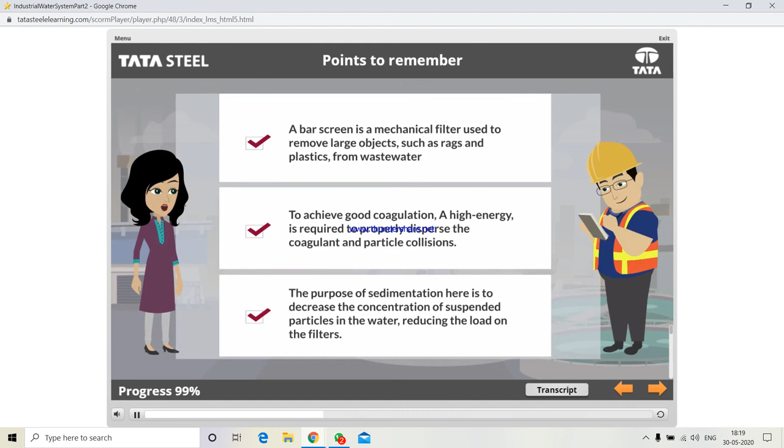A bar screen is a mechanical filter used to remove large objects such as rags and plastics from wastewater. To achieve good coagulation, a high energy is required to properly disperse the coagulant and promote particle collisions. The purpose of sedimentation here is to decrease the concentration of suspended particles in the water, reducing the load on the filters. Basins are useful because raw water entering the plant from a reservoir is usually more uniform in quality than water entering the plant without a basin.

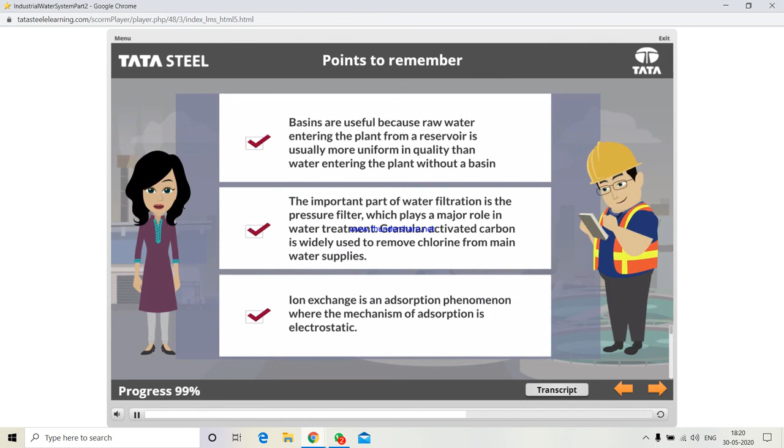The important part of water filtration is the pressure filter, which plays a major role in water treatment. Granular activated carbon is widely used to remove chlorine from main water supplies. Ion exchange is an adsorption phenomenon where the mechanism of adsorption is electrostatic. In reverse osmosis, the idea is to use the membrane to act like an extremely fine filter. Oxygen scavenging chemicals are very often added to the deaerated boiler feed water to remove any last traces of oxygen that were not removed by the deaerator.

Disinfection is an important step in ensuring that water is safe to drink. Water systems add disinfectants to destroy microorganisms that can cause disease in humans.